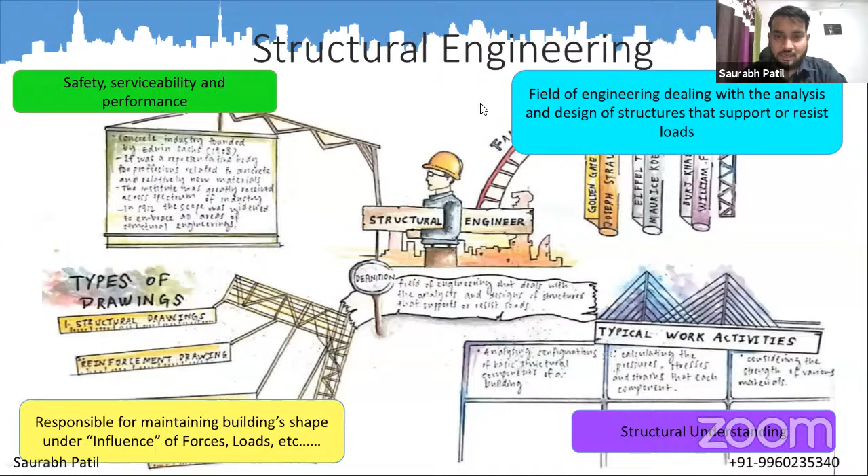If you consider the priorities, or the responsibilities of the structural engineer, the basic responsibilities - you can consider him as the doctor of the structure. Why? Because the structural engineer is a person who knows how the structure is going to behave, and what type of analysis needs to be considered in the analysis of the particular structure.

Again, he is the person who designs the structure for various gravity conditions, various loading and soil conditions, and lateral loading and all those things. And again, he or she guides to build the particular project, using various design aids as per the standards which are available.

Under the British standards or under the Indian standards, he or she guides the engineer to construct as per the assumptions or design methodology that is considered in the analysis and design department. So basically you can just call it the doctor of structures.

Now if you consider the roles of a structural engineer, these are the preliminary roles. You can't consider that these are the only roles he has.

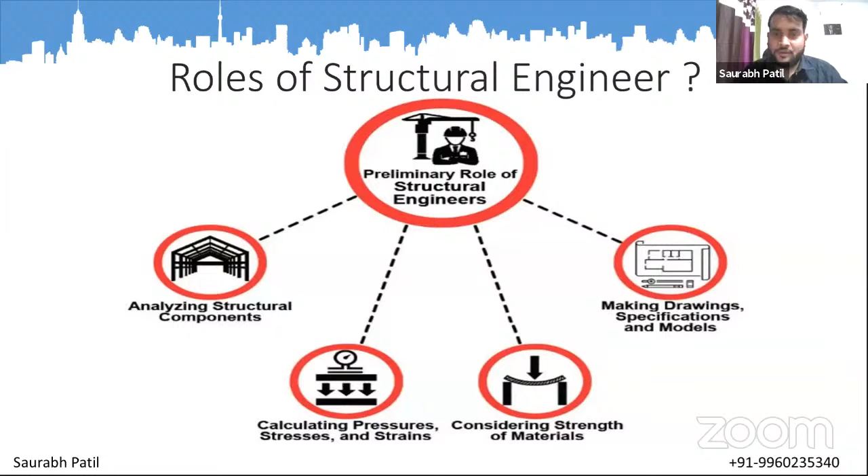So you should have a proper understanding about the strength of the material. Then you should have a clear idea about how to read the drawing. Then again, you have to prepare your own structural detailing drawing from the design reports or design data. So these are the preliminary roles of the structural engineer, and he is responsible for these things.

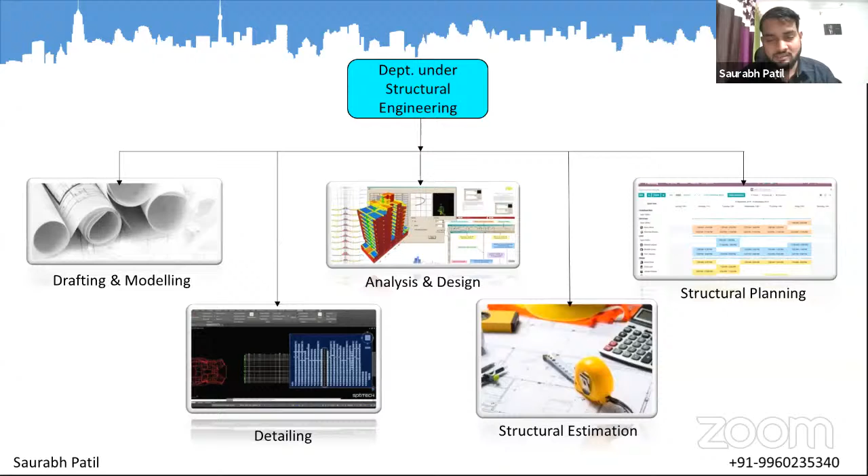In this field we use these particular softwares, but in the structural field you have to use AutoCAD and Revit Structure, and sometimes Revit Architecture. No need to work on Revit MEP.

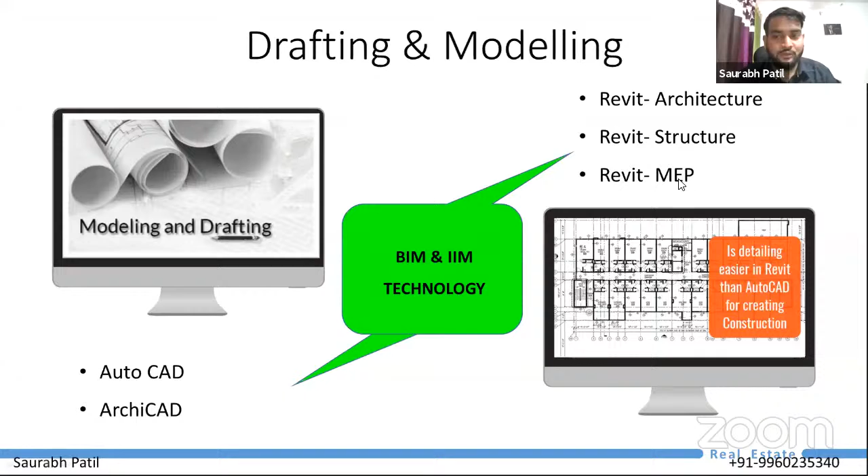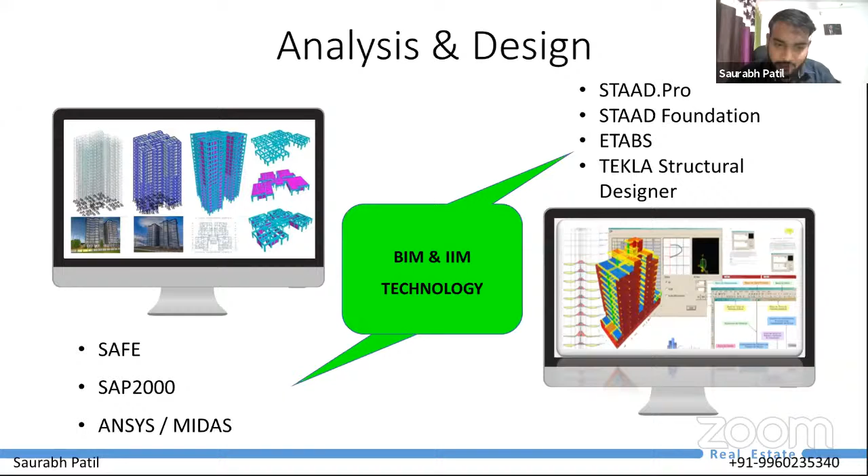Depending upon the requirement, you have to choose the software. Learning the software is a different thing, but understanding the behavior of the structure and understanding the requirement of the software is a different thing.

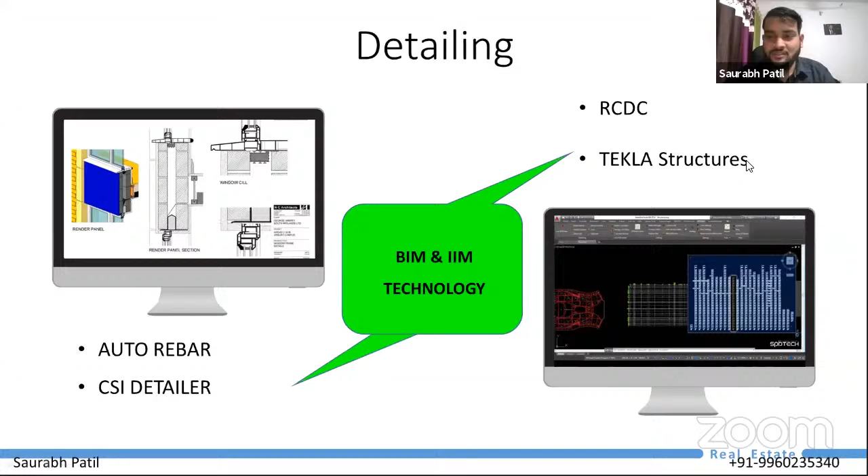Then for detailing also there are different software: Procon, RCDC, Auto Rebar, CSI Detailer are there. Again, Tekla Structure - you can model the element or model the project in Tekla Structure.

And this is the structural estimation. Basically what I mean is, suppose if you are working on a G+1, G+2 type of structure, sometimes your builder or owner of the project will ask you to just provide the quantity for the concrete and steel. So you'll be able to calculate the quantity of the bars and the concrete from the project, and you can submit it to your builder or owner. Such type of things are considered in structural estimation.

In structural estimation, we never consider the estimation of doors and windows and all those things. We consider the estimation of only structural elements.

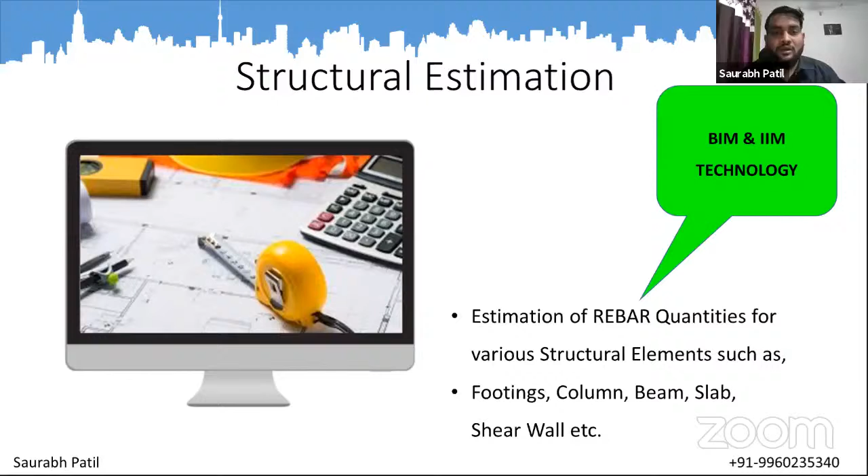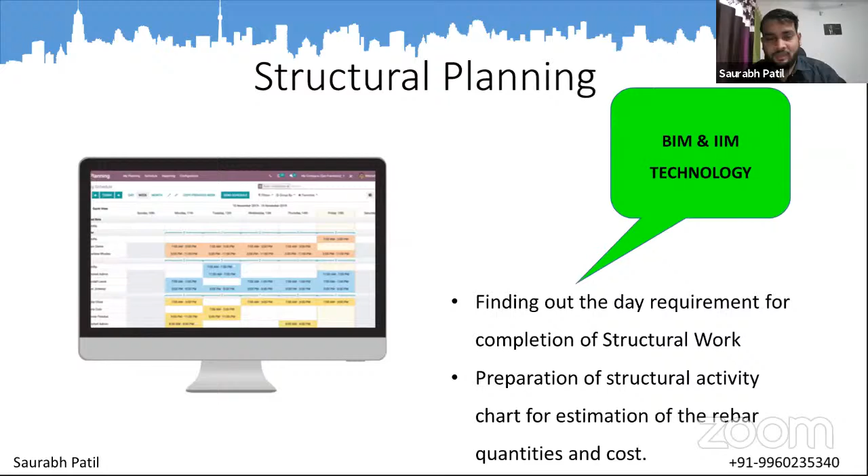Up to this part, we have discussed the basics of structural engineering, or the prerequisites for structural engineering. Now, to apply for the license, what is the procedure?

The first is to understand the requirements of the structural engineer. Then the second step is to complete your education.

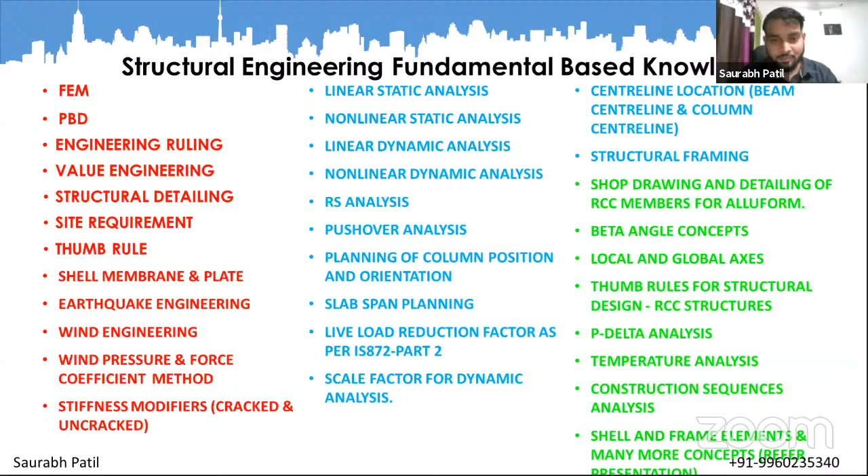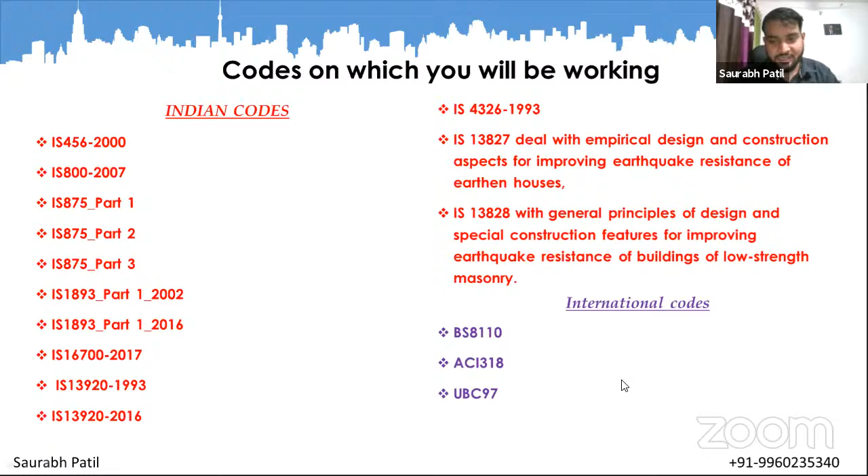Then these are the Indian codes along with a few international codes that will be there. On this you'll be getting a detailed review - a detailed review on all the codes, Indian as well as international, and when to use such type of codes. That we will discuss in the sessions.

Now the softwares that are there in the particular internship - there are three departments. One is drafting, modeling, analysis, design, manual design, and detailing. So these are the three departments, and under these three, these are the softwares.

In the BIM concept, only the conceptual understanding will be there - what is the BIM concept, how you need to consider this particular process, and which are the different stakeholders working in the particular process. What are the different job opportunities - all those things will be there in the BIM concept. The detail, that is 4D, 5D dimensions, we are not going to cover in this because it is a very vast field. Basic conceptual understanding will be there for BIM.

It will be near about, you can just consider a one week workshop on the BIM concept. Again, if you want, you can add these particular softwares as add-on. These are the few key projects that you are going to work on.

Now I'll just show you the snapshots of the projects. So this is a residential project - again a solid slab, that is a normal slab, with beam, slab, and column, and the detailing of the slab is there. Then waffle slab, that is a grid slab.

Then this is a 3D modeling of the ETABS model. Again, a roof slab is there, then wash tower is there, then such type of modeling will be there for low rise type of structures. Basically, at the end of this internship you will be able to design your own house or any project of such nature.

Again, this is an industrial shed, that is a PEB. You can just consider tapering sections are there. So columns, beam columns and the tie sections are the tapered ones.

Again, this is a steel multi-bay structure, in which the deck slab will be there, and secondary and primary beams are there along with some columns, and the lateral bracing is there.

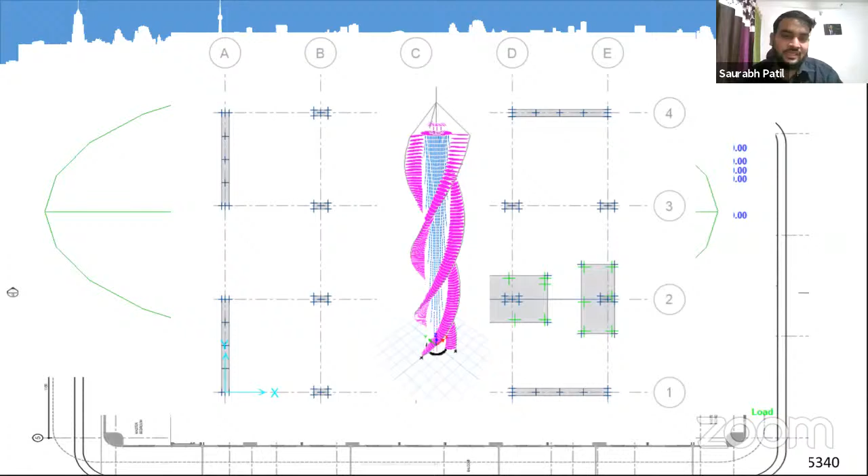Again, this is the plan view of the same project that we had discussed just earlier, that is the basement one. Again, this is the flat slab. Here we have considered the slab along with the drop panel and the column.

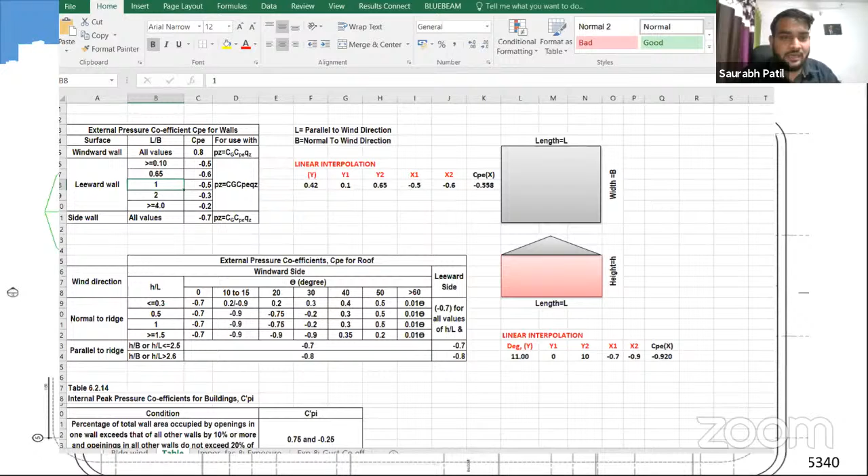Again, these are some screenshots of the Excel sheet that we are going to consider in the internship. Such type of Excel sheets will be there in your course. And each and every Excel sheet that we are going to consider, the same Excel sheet you are going to prepare, and we are guiding you in the preparation of all these Excel sheets, so that at the end of the internship you will have your own software for the analysis and design. So suppose if you are working with the British standards or US standards, all the things will be in feet and inches.

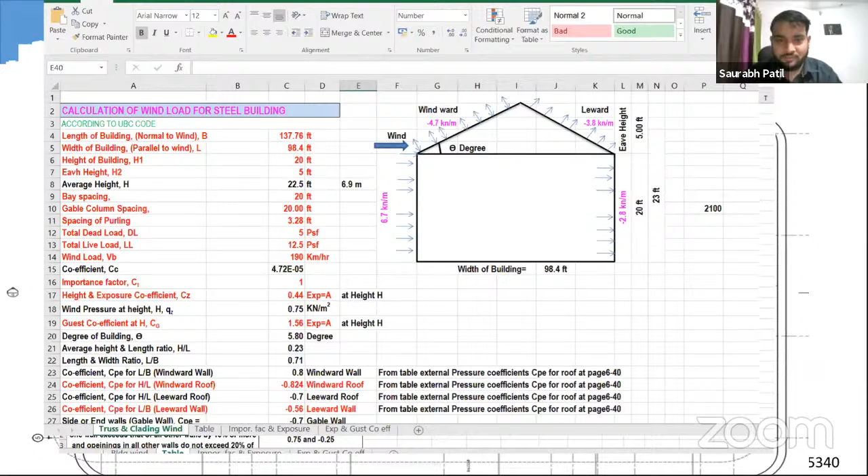So in that condition, you have to work on feet and inches as well as psf. These are applicable for the US standards project. So this is the screenshot of my BE project, the preparation of it. I have prepared one software in Excel only for the steel design.

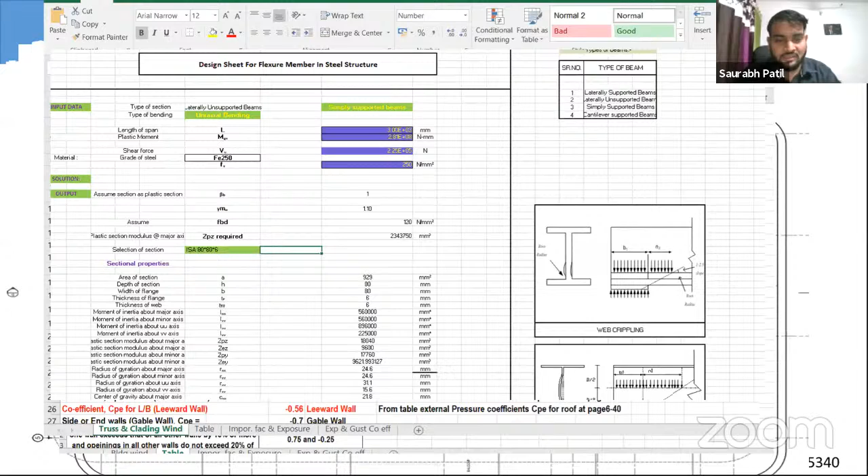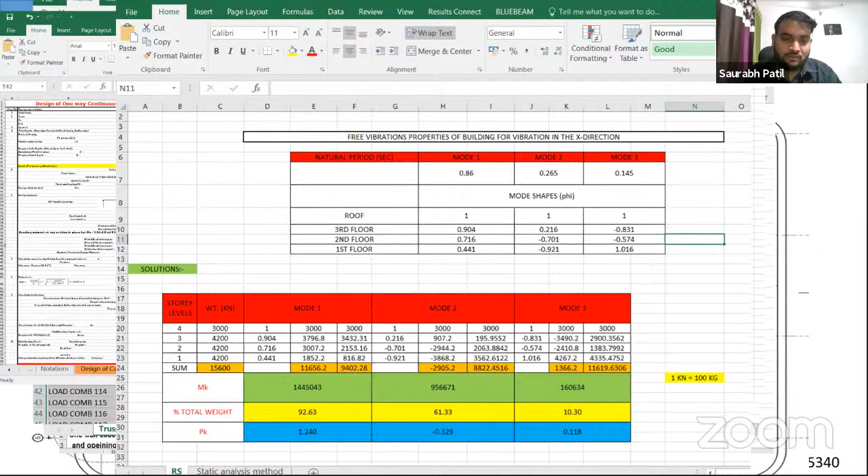So these are some screenshots. Again, the same picture is there. So this is how you'll be able to study the vibration and modal analysis as per IS 1893, 2002 and 2016, manually. So that was the manual design, manual analysis.

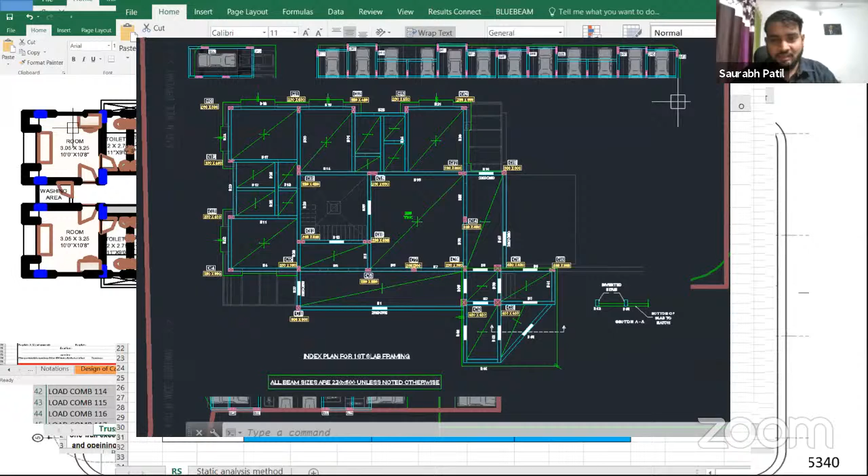So this type of project will be there, so you'll be getting a proper idea of how to consider the structural framing and all those things. So such type of projects will be there. The number of projects will get increased or decreased depending upon your response, because we are completing a project, not just a task. We need to complete that project effectively and conceptually.

And these are some takeaways from the internship: you'll be getting the Excel sheets, the experience, and guidance on the job portfolio, resume, and all those things will be there. So now, that's it. This was about the structural internship program.

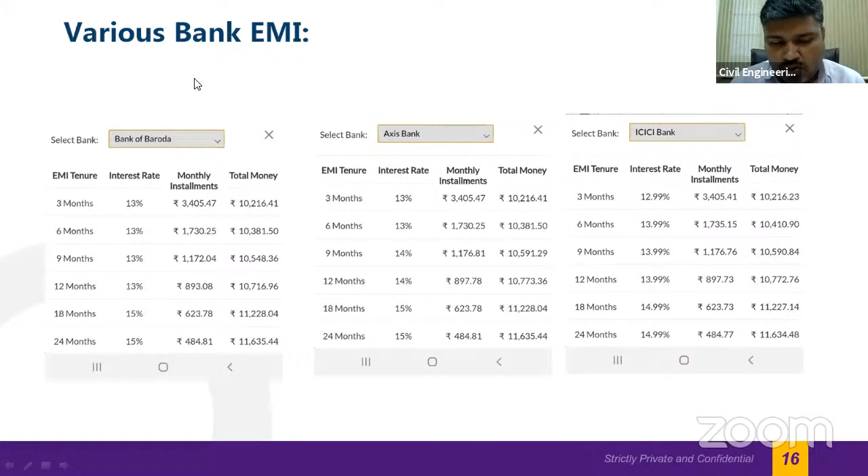ये बैंक के तरफ से अवेलेबल है। हमारे तरफ से दूसरा मॉडल है जिसमें 40,000 आप डाउन पेमेंट कर सकते हैं। 1,000 तो बुकिंग है आपका, 40,000 डाउन पेमेंट कर सकते हैं और 10,000 के 3 चेक देने पड़ते हैं पीडीसी। ये सारे ऑप्शंस हैं।

कॉन्टैक्ट नंबर और जो आपको अगर मिलना है तो यहाँ पे आपको 3rd फ्लोर पे केतकी प्रीमाइसेस है, जो अलका टॉकीज, पूना में अलका टॉकीज है, अलका चौक भी कहा जाता है। डेक्कन का बस स्टॉप भी नजदीक गिरता है वहां से। अलका टॉकीज के बाजू में ही ये केतकी प्रीमाइसेस है, बैंक ऑफ इंडिया है, उसके पीछे साइड में है, 3rd फ्लोर पे आपको आना पड़ेगा।

वहां पे आके आप यहाँ से भी बुकिंग कर सकते हैं, कुछ डाउट्स रहेंगे तो भी पूछ सकते हैं। 15th लास्ट डेट है ये करने की। अगर ये हो गया तो 2 बैचेस भी हो सकती हैं, मतलब नेक्स्ट बैच 2 to 6 PM की भी हो सकती है। 4 आवर्स तो कम से कम हमें लगता है कि आपने देने चाहिए, उसके बाद के आपके ऊपर डिपेंड करता है। हमारा ऑफिस तो कंटिन्यूस ओपन रहेगा।

मैं ये भी शेयर दिखा देता हूँ कि ऐप के ऊपर क्या क्या है। ऐप के ऊपर आपको स्टोर में जाना पड़ता है, स्टोर में जाके सर्च करना है स्ट्रक्चरल इंटर्नशिप। तो उसमें ये 7 मंथ्स इंटर्नशिप है, 1 मंथ का भी है, 3 मंथ का भी है, लेकिन अभी इसके बैचेस नहीं हैं।